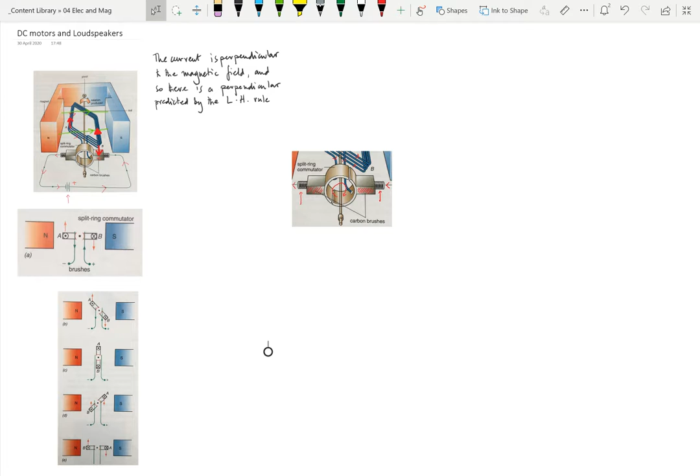We start with this one here. This is an end view, so this is looking from the end. It's not a 3D picture. And just so we can all be clear, the commutator is in here, so I'm just exaggerating it a bit. The black dot in the middle is the axle.

On the left-hand side, the current's coming towards us, which is at side A. On the right-hand side, the current is going away from us from side B. If you use the left-hand motor rule, you will confirm again that the forces are like this. And now we can see it's going to spin.

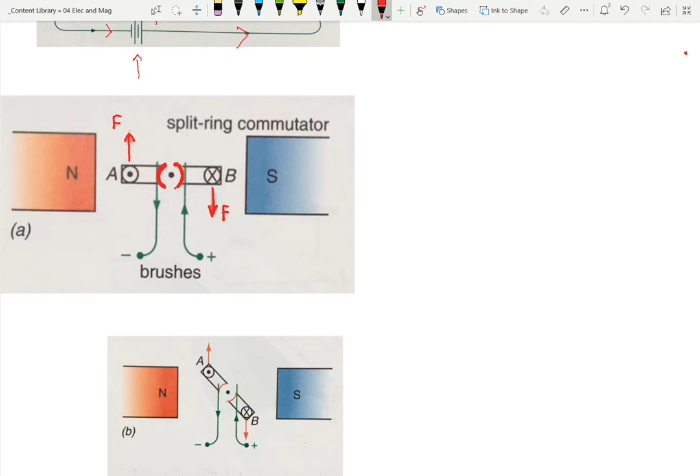But I finished last talk by saying, well, what exactly is the commutator for? We know it's to allow contact to be made with the rotating coil, but it also performs another very important function, which we can tell by looking at the sequence of pictures below. Again, I'm just going to make the commutator a bit more obvious.

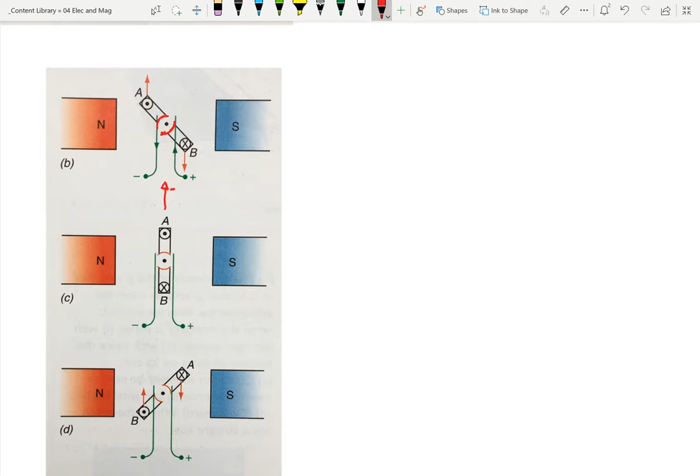It should be round, and you can see that what's going to happen is that the coil is going to spin. But when it reaches a vertical point, if we still had a current, then this force would be this way, and the force on side B would be this way, and instead of actually making the coil rotate, it would just be pulling it apart.

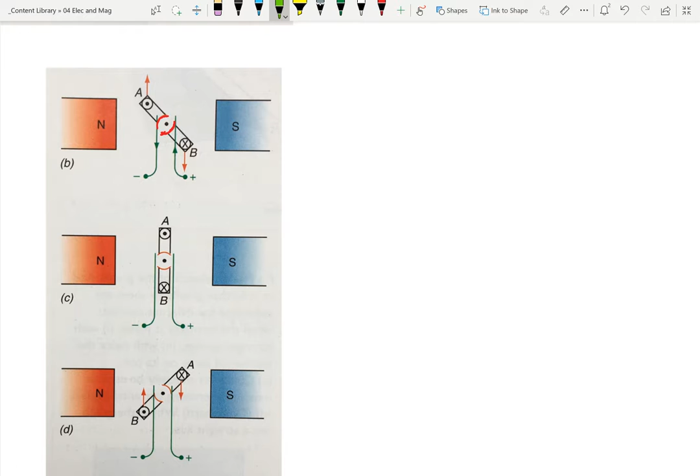So that's pointless, and so we'll get rid of that. Just to remind you, the magnetic field is going across this way from north to south pole. So we can show that the force on current A would be upwards and the force on current B would be downwards, but as I just said, that's pointless.

We can also see that in the commutator, momentarily, the contacts, the brushes, are not touching. So actually the current would switch off, which is probably pretty sensible. But as it turns, it continues rotating with its momentum.

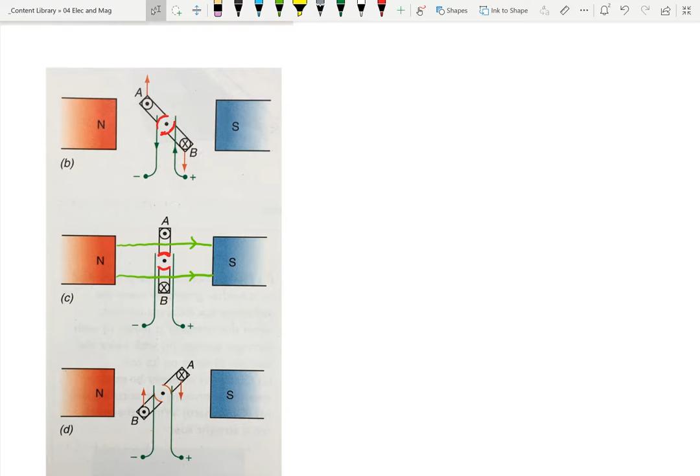We get to part D. And what we see is that the top half of the commutator, the top half of the split ring, now touches the other side of the battery. So we get this top half now touching the right-hand side, whereas before it was touching the left-hand side. And the right-hand side is positive.

And the dot that we had at side A is turned into a cross. Now, you will remember that the dot means the current's coming towards you, and the cross means the current is going away from you. So this force that was up on A will now be down on A.

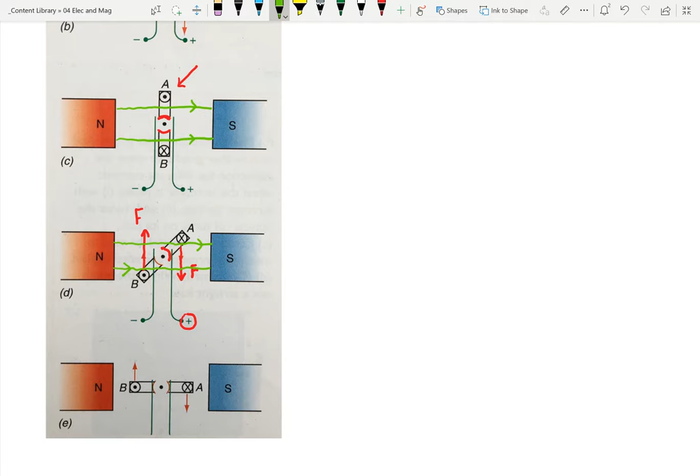Similarly on B, the force on B will be upwards. The magnetic field, by the way, has not changed. It's still going from left to right, like that, through the coil. So that means our rotor is going to be okay for another 180 degrees.

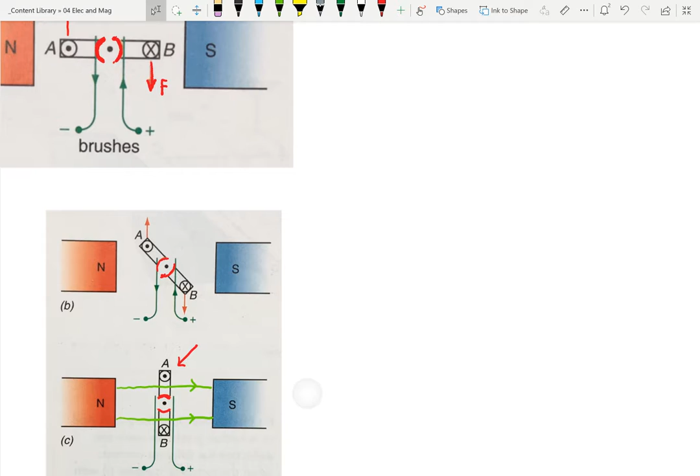And what do you think happens then? After another 180 degrees, going from picture C to D to E, then we'll get back to picture B and then C, and then the current will switch back. So the commutator, with its split rings, switches the current.

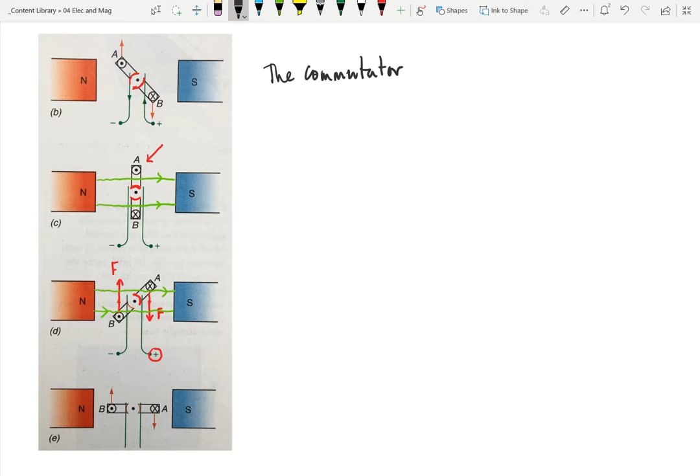So let's just make our picture a little bit smaller and write that in notes. The commutator - it has got two M's, I checked that out. The commutator has two functions.

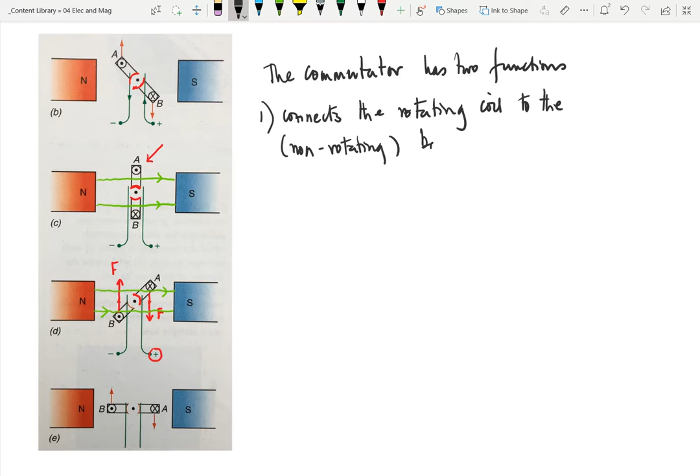The first function is that it connects the rotating coil to the non-rotating battery, or it could be the mains, of course, via the carbon brushes. And they are sliding. So that's the first very important aspect of the commutator.

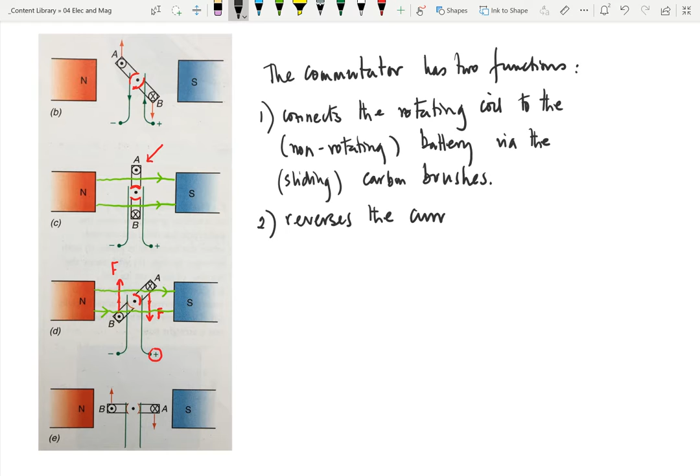But what we've been looking at today is that the commutator also reverses the current every 180 degrees, allowing continuous rotation.

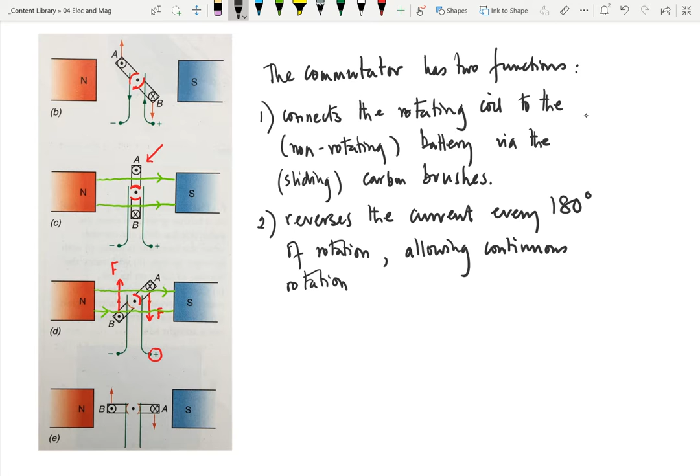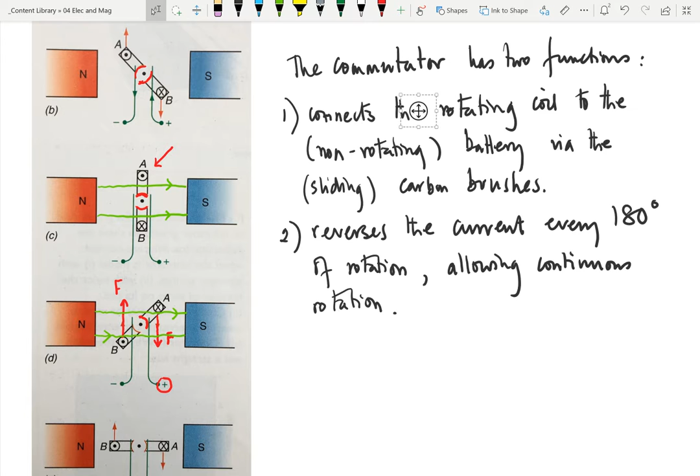Now you might say to yourself, why doesn't it stop in position C? Well, one of the answers is because it's already moving. So because there is no force, there is no turning force at position C. So when we get to position C, it could stop. And actually, our simple kit sometimes does stop in that position.

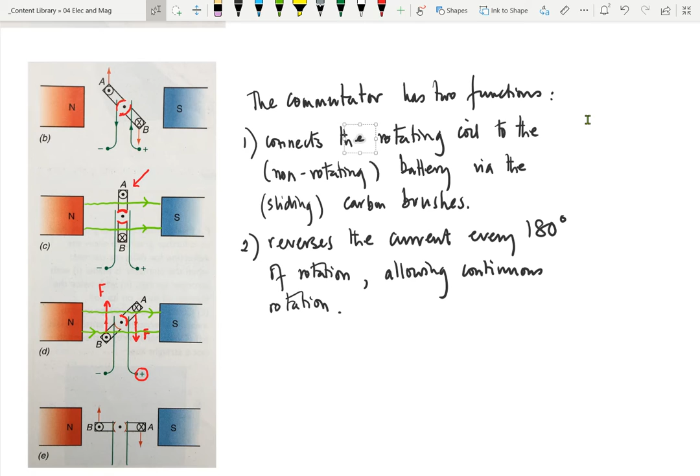Another problem with our simple kit is you have to give it a flick to get it going. That wouldn't be much use for your electric drill or for your Hoover or for any other electrical appliance if you have to give it a flick to get it going. So next time, we'll have a look at how we improve this design and make a really good DC motor.